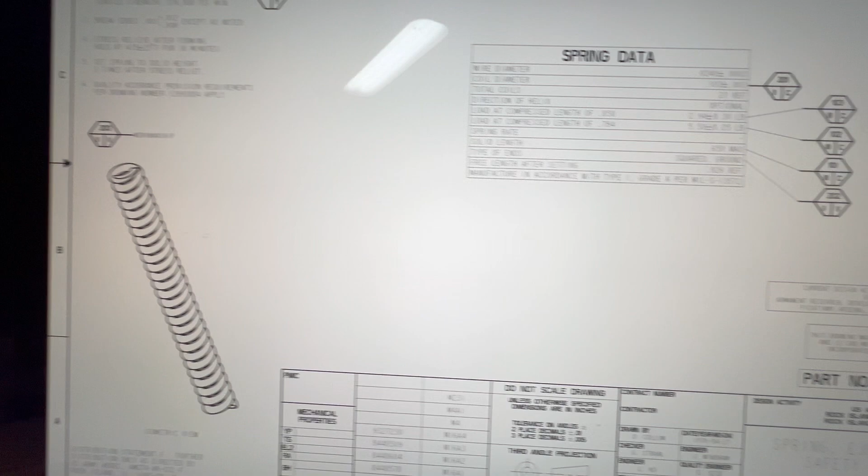Like I said, this one here is brand new. I just got it yesterday. Had it on order for over a week, and that's for another project I got going over here. But I decided that I was going to see what that spring is supposed to be. So I looked it up on the technical data package. And you can see that that spring is also used for the safety detent. So the ejector spring on the bolt and your safety selector, that's the same exact spring.

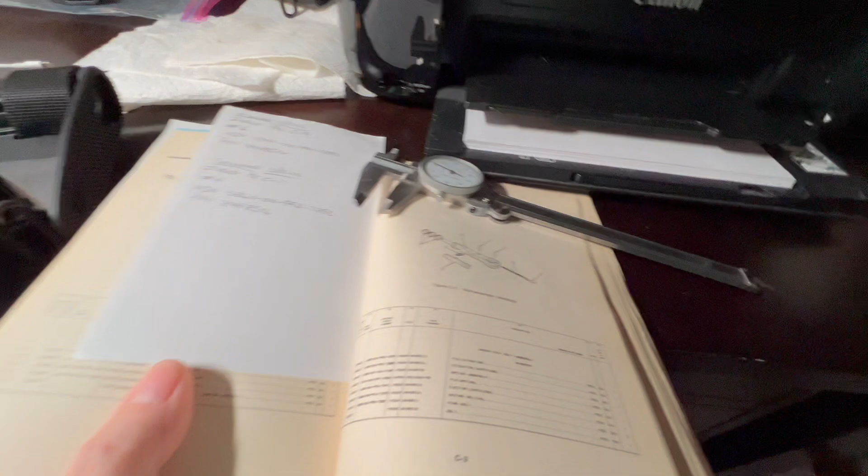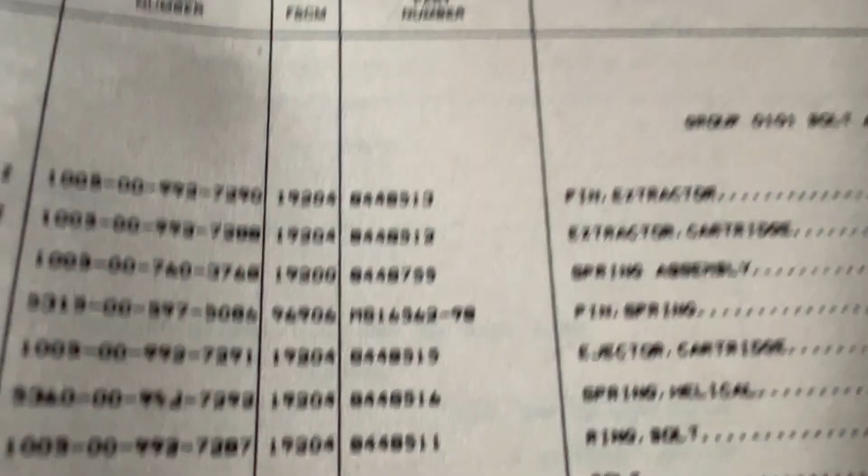So then I thought, well, I'm going to double check this. And so I got my old Marine Corps manual out. And first thing I looked at was the bolt, and that spring is item 6. Let me try to blow this up. So if we go to item 6, you can see 8448516, which matches that part number.

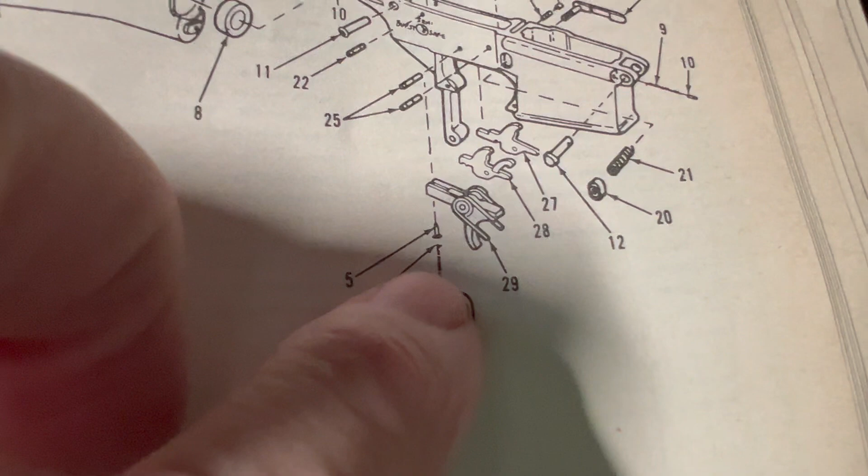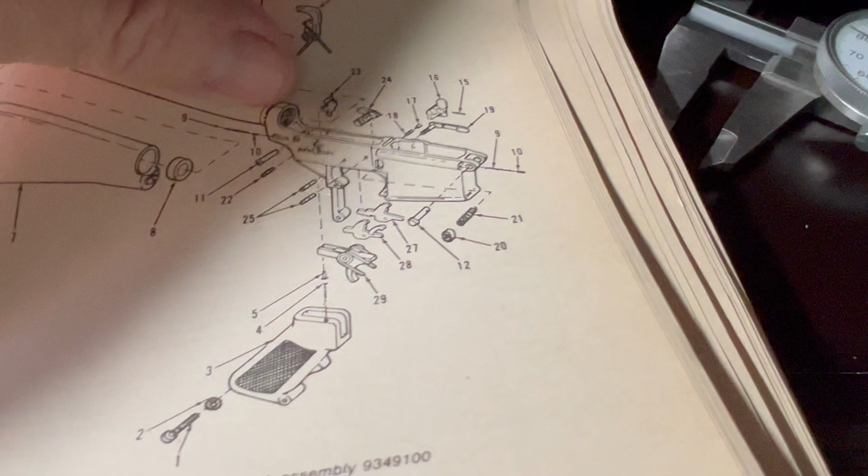Okay, so let's go take a look at the selector and just verify. So the selector is on C17. It's kind of hard to tell off the drawing, but there's your selector spring for item number 24, which is number 4 on this drawing. So we'll go over here and we'll take a look at number 4. And that is the same part number, 8448516. So we have verified to my satisfaction that that selector spring and the bolt ejector spring are the same

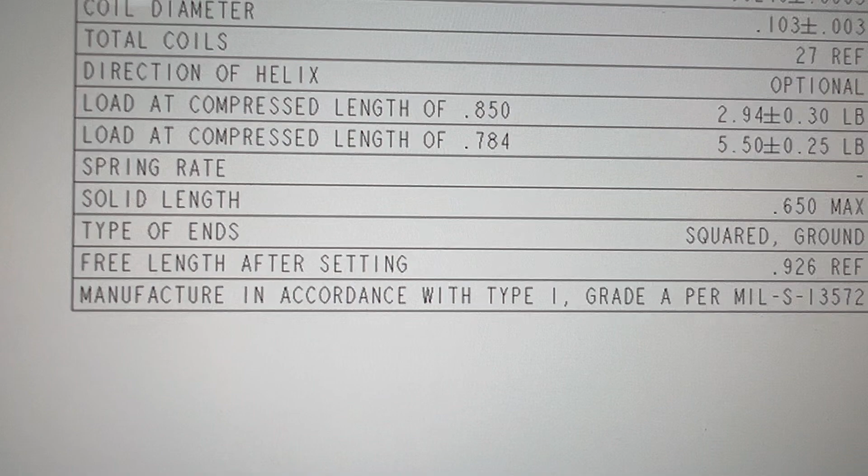part number. Now I'm getting ready to take this apart, and I have a special tool that makes it easy to knock the pin out. And I'm going to verify all the spring measurements as best I can. And here's all of the spring data. Okay, so like I said, I'm going to take this apart. If I find anything, I'll do a follow-up video. We'll cover some of the same information again, but I'll tell you guys what I found if I find anything. If you don't see another video on it, then you know it was good.